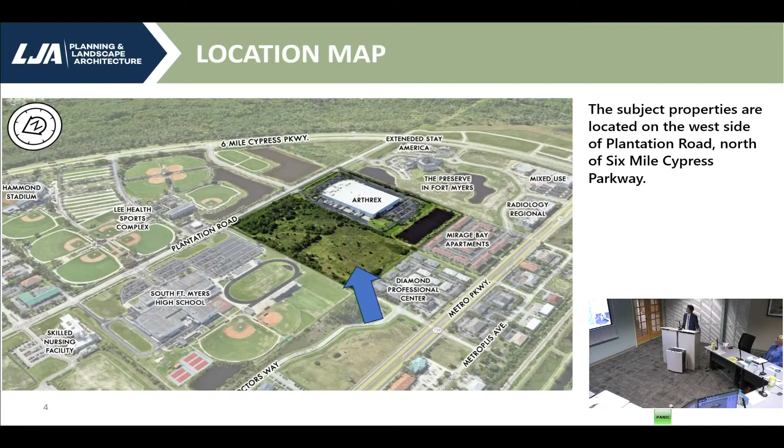The request: the applicant is requesting to rezone its 37.7 acres from IPD and RPD to an MPD, a mixed-use plan development. The application includes 2 parcels. The IPD parcel currently includes 46,000 square feet of office uses and 210,000 square feet of warehouse uses. The applicant is proposing the mixed-use plan development to allow maximum flexibility as the project moves forward. They're not exactly sure what it's going to be, but this gives them some flexibility.

There are a couple of different options here. The options and limitations are based on 2 scenarios. One is limited to a maximum of 105,000 square feet of office and 5,000 square feet of medical, or 80,000 square feet of retail and 5,000 square feet of medical office. Then you've got scenario B, which is limited to 30,000 square feet of retail office and 295 standard multifamily residential units plus 168 bonus density units. I hope that's not too muddy, but those are the 2 scenarios set forth in the request.

So basically, what you have here is a bubble plan that would allow for either alternative. I'm puzzled by the note, though, on the building envelope. It doesn't indicate that it's an either-or scenario, and my concern is that might cause some confusion.

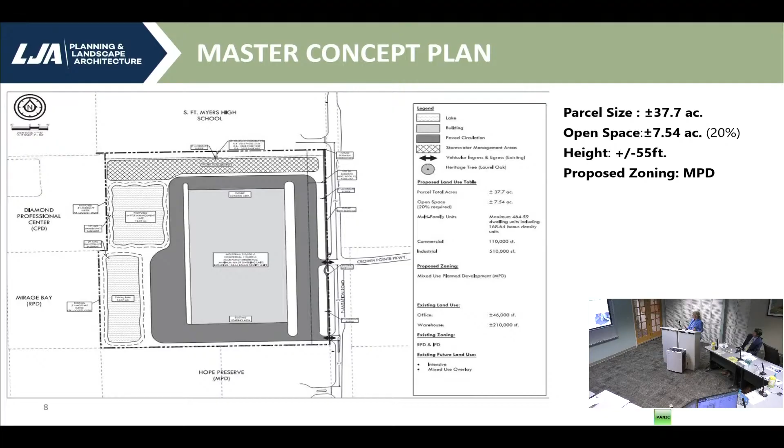So again, the compatibility and fit within the surrounding area. This aerial is a great depiction of all the existing uses around the subject property, creating a great mixed use that supports the mixed use overlay that the county has adopted. This project, it's not technically in there, but it essentially represents an infill project within the area.

So you're saying the enhanced vegetation that was required by virtue of the earlier approval that predated the mixed-use overlay adoption, that vegetation is going to remain in place and be maintained going forward? Yes.

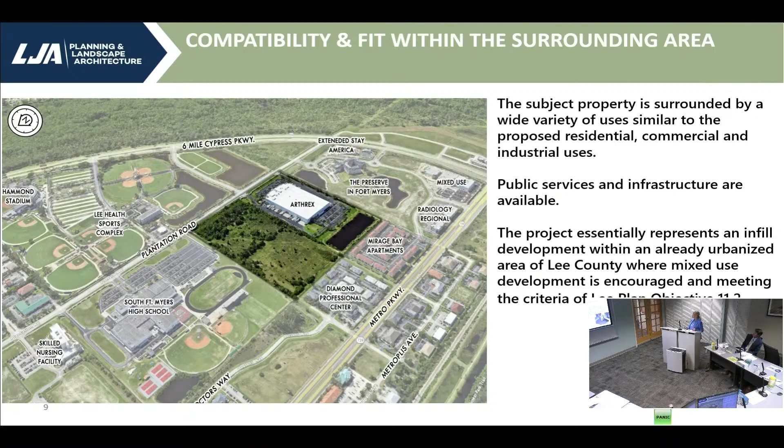Yep, and my square, this square is bigger than what I accommodated on the PowerPoint. I apologize. Well, you're not alone. That happens with many presentations. Yes, I'll work on that for the next one.

This is depicting the surrounding zoning and land uses, showing that to the south there's additional mixed-use planned development. To the west, as discussed, there's a residential planned development that's primarily a rental apartment complex, and just north of that is an office complex. To the north is the high school, and we've had discussions with the high school on compatibility, and they didn't have any issues. I do believe there's a letter of their review in the file that's part of the record. To the east, there's another commercial planned development, and of course the CenturyLink Sports Complex, Hammond Stadium.

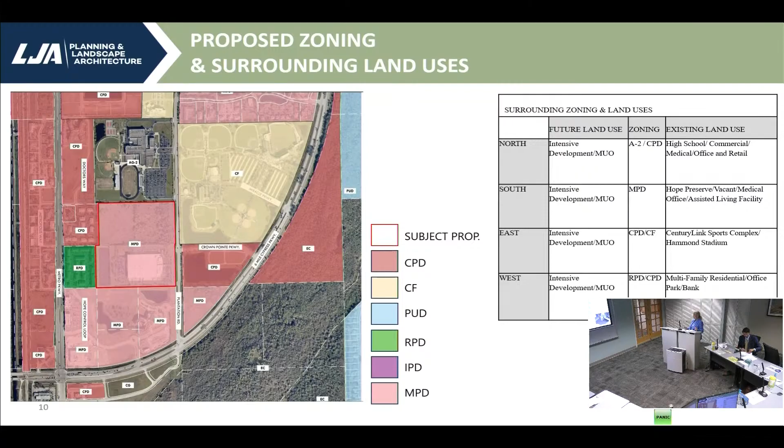The future land use map. This property is surrounded by intensive development, and the property itself is existing as intensive development. On the east side of Six Mile Cypress, you'll see there's conservation, and the sports complex is designated as public facilities.

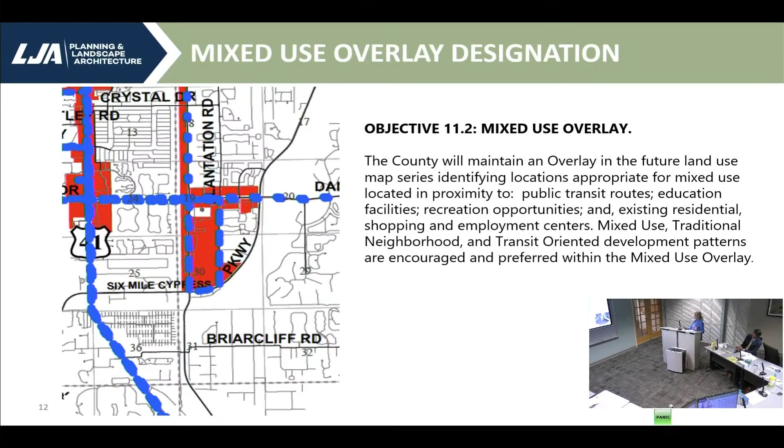Going into the mixed-use overlay, it talks about what to look for in development within the mixed-use overlay. That includes public transit, educational facilities, recreation opportunities, and existing residential employment centers. The surrounding area has a little bit of all of these different criteria, and this project adds to the employment center and potential future residential as well, as they go forward.

The mixed-use overlay, this project is consistent, as I was saying, based on that it includes some multimodal connections, and as I mentioned, the adjacent residential is 500 feet from the existing building. There are existing and proposed internal pedestrian connections, and there's no intrusion to the single-family neighborhoods.

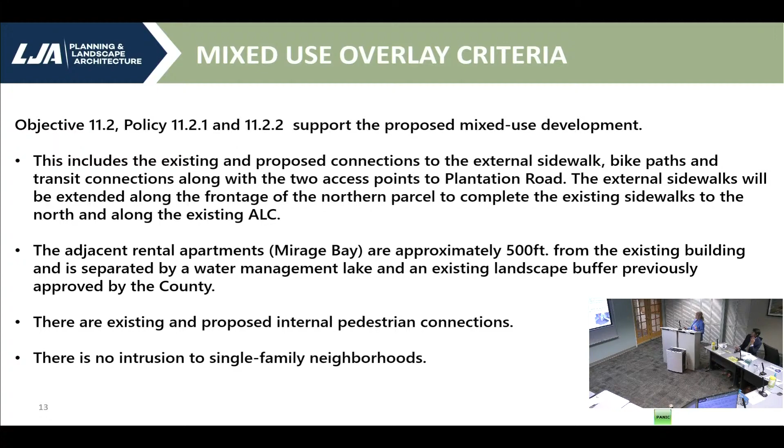This slide shows a list of the applicable Lee Plan goals, objectives, and policies that the project is consistent with. If you would like me to go through the details, I'd be happy to do that, or we can proceed to the next slide.

I feel there was a comprehensive analysis provided in the applicant's narrative that accompanied the staff report, so we'll rely on this PowerPoint and that exhibit, which is part of the record. All right, thank you.

Highlighting goal 39 regarding transportation, it talks about multimodal transportation systems. The proposed mixed-use development will integrate multiple land uses, including residential, commercial, and industrial, and connectivity to the adjacent area is provided.

There are existing sidewalks shown here. The red area notes sidewalk that will be added by this development. There are existing sidewalks on both sides of Plantation Road and crosswalks to accommodate pedestrians crossing from one side to the other. There are two transit stops: one on the mixed-use development to the south, and one in front of the high school.

Okay, let's go back to the site plan for a minute. Here's my concern with regard to the possibility of over 400 dwelling units.

It may be too late for you to modify your master concept plan, but many times when we have a number like that of residential proposed, we ask for some accommodation for a pullout outside the lanes of traffic for pupils to board and disembark from the school bus for safety reasons. So if you can't modify the master concept plan at this time because you want to keep your options open, that is going to be a condition I will impose, as I have done in many other cases.

Richard Aiken, the attorney, anticipated this. Okay, and we have a proposed condition that I'll read and then provide to you.

Development order plans for multi-family residential dwelling units must include safe pedestrian and bicycle access to the school bus stops. The site plan must depict locations for school buses to stop, load, and unload students. Plans must also include a dedicated area for students to wait for the school bus. These waiting areas must be outside road right-of-ways and coordinated with the Lee County School District.

All right, so I'm going to turn this over to our transportation expert, Jim Banks, to go through the next few slides.

Good morning, Madam Hearing Examiner. I'm really here more to answer questions, but I'm going to give you a brief overview. For the record, Jim Banks, here on behalf of the applicant. I won't go through my experience and qualifications since you have that on record, and I've been accepted as an expert in transportation engineering in this forum before, so I can go right into testimony.

My firm, JMB Transportation Engineering, of which I'm president, was responsible for preparing the traffic impact study for this application. You have it in your record. The traffic study was prepared pursuant to the criteria set forth by Lee County government.

The traffic study evaluated the impacts of the project based upon the potential development of the most intense development scenario, which we have defined as scenario A - you refer to it as scenario 1, but we have it in the documentation as scenario A. I won't go through those land uses since it's already been outlined, and you can stick with A and B on your master concept plan if that's what you've used before.

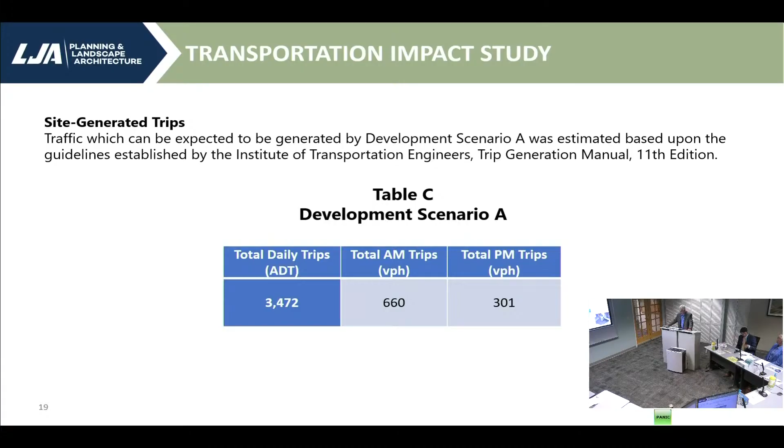That's all in the report, which Lee County staff did review, and they agreed with the report's findings and conclusions. That is, it was determined that development of the most intense land use scenario, scenario A, will not adversely impact the surrounding road network.

It was also verified that all roadways within the project's area of impact currently have a surplus of capacity and can accommodate the traffic associated with the project, and the road network will continue to operate at acceptable levels of service at project build-out. It was also determined that this project will not create any transportation deficiencies that will need to be mitigated. But the report does identify that the intersection of 6 Mile Cypress Parkway and Plantation Road currently operates at an unacceptable level of service, regardless of future development of this site.

Staff agreed with that finding, and we determined that the only way to achieve acceptable levels of service at that intersection would be to install a traffic signal. There are other projects already in the lineup for making a contribution towards that. I think the primary driver is the project to the south, but I'm not sure exactly. There are several other projects in the hopper for that as well.

The only thing I'd like to clarify is that we're not objecting to the pro rata share. We want it administered fairly, which it will be, and it only applies to future development of this project. Part of this site has already been developed, so we're not going to go back and assess what's already been built. It only applies to future development and net new trips generated from the site. I just wanted to put that on the record. That concludes my testimony, if you have any questions.

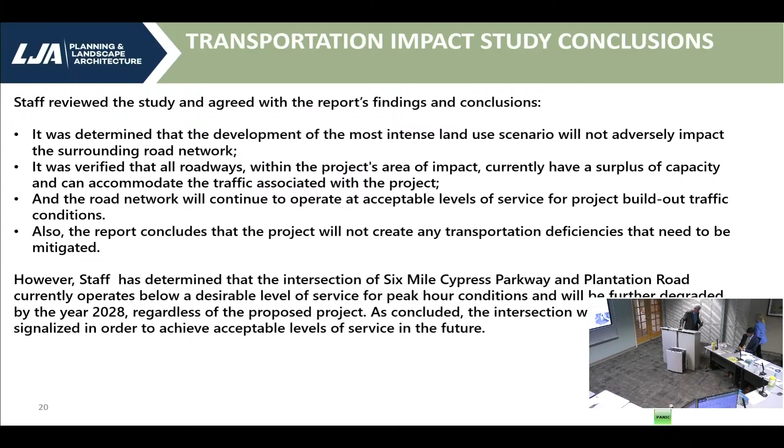Our next expert is our environmental consultant, Jeremy Stirk. And after Jeremy, we have Jim Carr, who will discuss some stormwater conditions.

Good morning, for the record, Jeremy Stirk. I'm with EarthTech Environmental. I have been accepted as an expert in this forum before.

Essentially the vacant parcel is an abandoned agricultural parcel. It was historically ag, and it just hasn't been in agricultural use for a long time, so therefore no indigenous vegetation was identified on the site. As you can imagine, the entire area has been developed on four sides, which really made this parcel a bowl.

It's classified as hydric agricultural, so we did do a formal jurisdiction determination with the Water Management District. They found 16.63 acres of wetlands. I'll give you a map - the wetlands are identified on that map, hatched in green and blue.

We have done listed species surveys on the site - very, very low quality habitat, not really conducive to anything. We did not identify any listed species on the property. Are there proposed impacts to wetland areas? Yes, there absolutely would be. Those will be mitigated through the Water Management District and the Army Corps of Engineers as necessary, off-site.

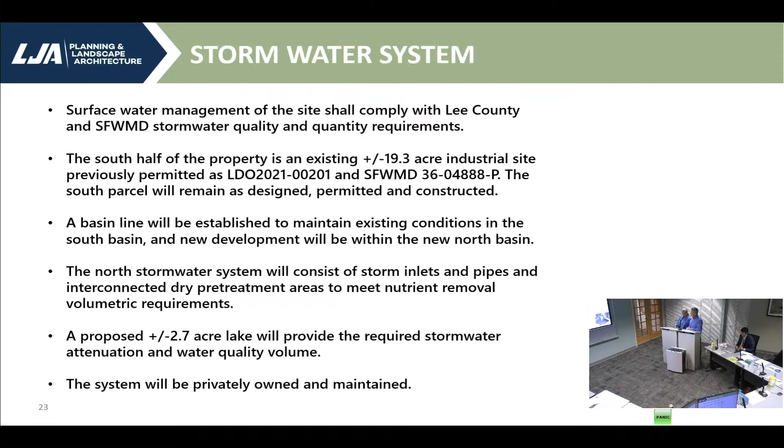So can we bring up the site plan and you can explain to me the way the stormwater runoff is going to work? Yes. Identify the pretreatment areas and the outfall, just the path of which stormwater is going to take. I think that works.

Okay, so like I said, the southern half of the parcel is developed. The lake for that parcel is on the west side. All the runoff from the development runs west through a detention area and then into that lake. The control structure is on the southeast corner of that lake, and discharge is along the southern property line heading east to Plantation, and then it's piped south out to, I believe, one of the roadside ditches south of the property. So that system is in place existing.

With the expansion to the north, we anticipate we'd have a separate basin for that north area. It could be combined into one, but I expect it'll be a second basin. So with the amount of additional building and pavement that will occur there, less the north piece, the north hatched area that you see, that area is set aside for compensating floodplain storage. But with that new development impervious area, we've come up with a lake area that would accommodate that expansion, and then that lake would discharge south into the existing property.

So it would be controlled at its allowable discharge rate, and then the north lake is going to discharge into the south lake and eventually outfall to the ditch on Plantation Road. Correct, subject to future permitting.

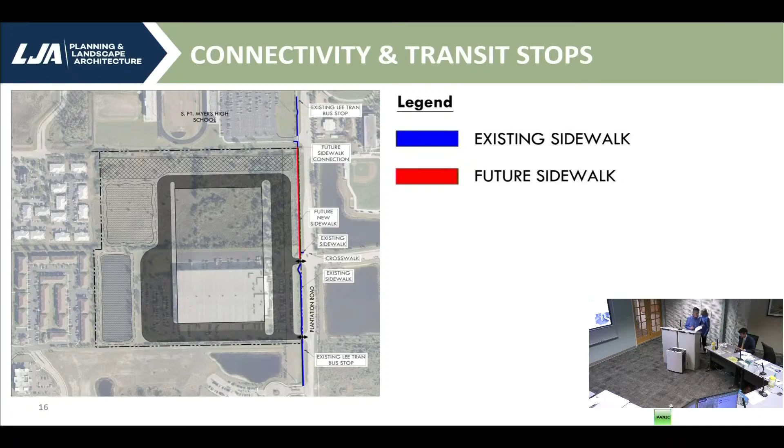So we're at the conclusion stage, and we request that the request complies with the Land Development Code 34-145, with those sub areas as conditioned.

The applicant is in agreement with the staff report and conditions as clarified in the 48-hour letter. The applicant is in agreement with staff's recommended deviation regarding the buffer in the FPL easement.

And just to discuss this a little further, the applicant had initially requested a deviation for this buffer because the existing development had received a letter of agreement with FPL for a modified buffer that exists, primarily a hedge. We were looking at doing the same thing, and in talking with FPL, we'd have to go through that process with them to get agreement on what we can put in there, while also accommodating the requirements for Lee County.

So when we got the staff report, all of a sudden staff was recommending that we have this deviation. We agree with it, and there's no issue, but there's a little history to it, and I just wanted to explain.

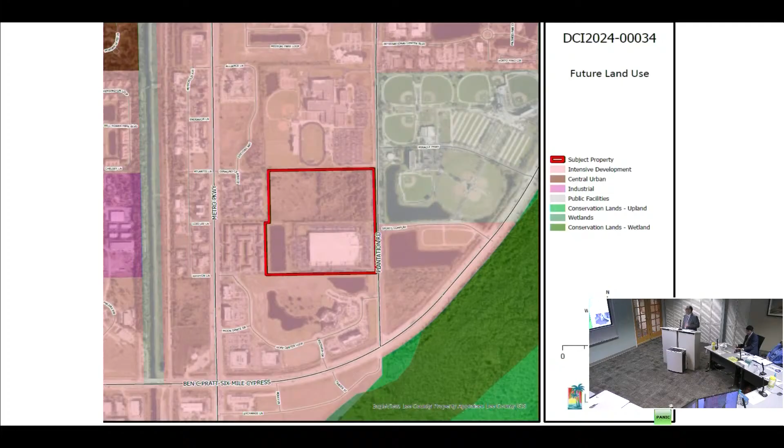The future land use is intensive development, surrounded by intensive development with the exception of Hammond Stadium. It is within the mixed-use overlay area.

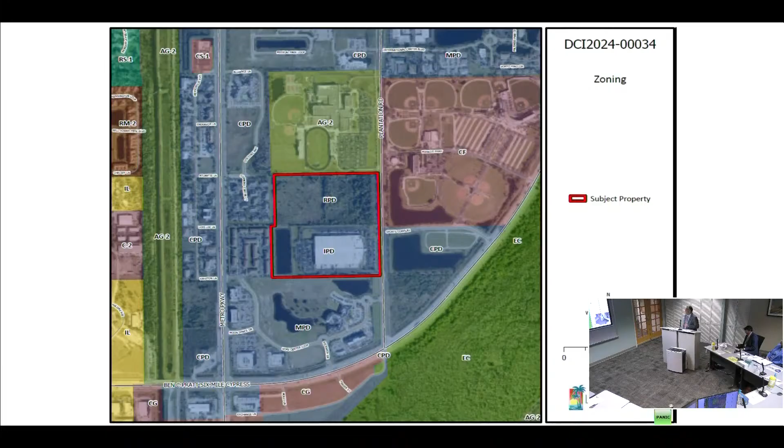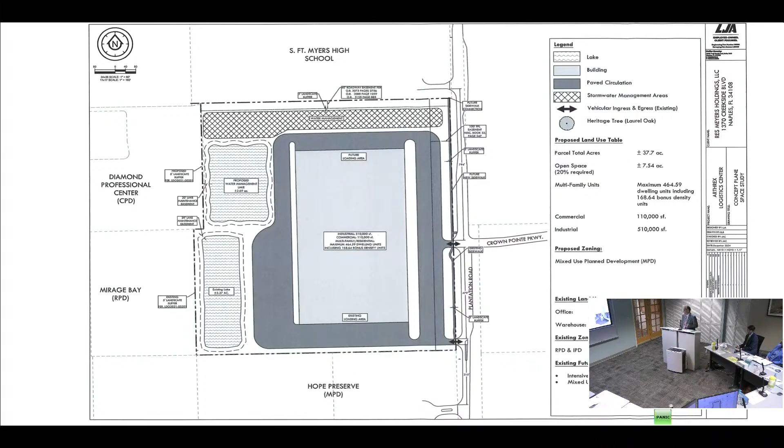In case it becomes a residential project, it's my experience with these things that with 460 units, it's more than likely the school district is going to ask for something inside the development, so the bus pulls inside and loads students there. They don't want 50 or 60 kids along the sidewalk, but that's going to be up to the school district to decide.

Staff reviewed this request to make sure they are in compliance with the Lee Plan and land development code regulations. These are some of the goals, objectives, and policies that staff reviewed to ensure full compliance, and they are.

And they are being served by major roads, and utilities are available. Everything is available there.

This is the transportation condition that you mentioned. They negotiated this basically with the Department of Transportation, and both sides are happy with it.

We have some environmental conditions that they agreed with. For deviation, staff proposed one deviation just to be on the safe side. During the review, they didn't want to have a problem with other departments saying they needed a deviation, so we added that deviation just to make sure the process goes smoothly.

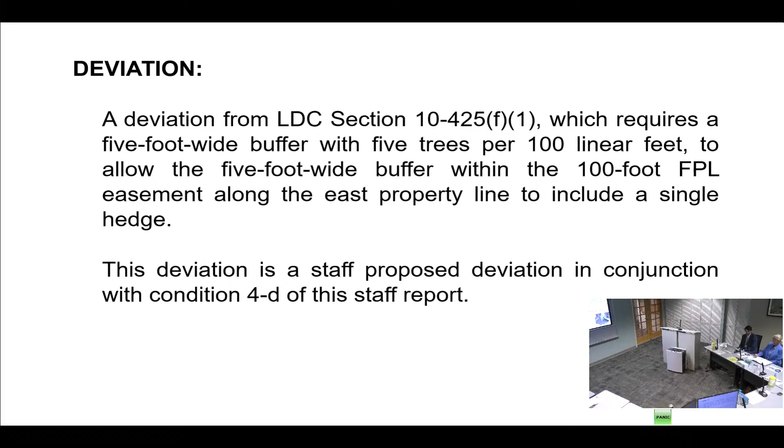Okay, if there isn't anything further, I will conclude this hearing. I will leave the record open until noon tomorrow for this replacement information. If for some reason that can't be accomplished in that time, please notify my office and we will extend that. Thank you for coming today. That concludes the hearing. Thank you.